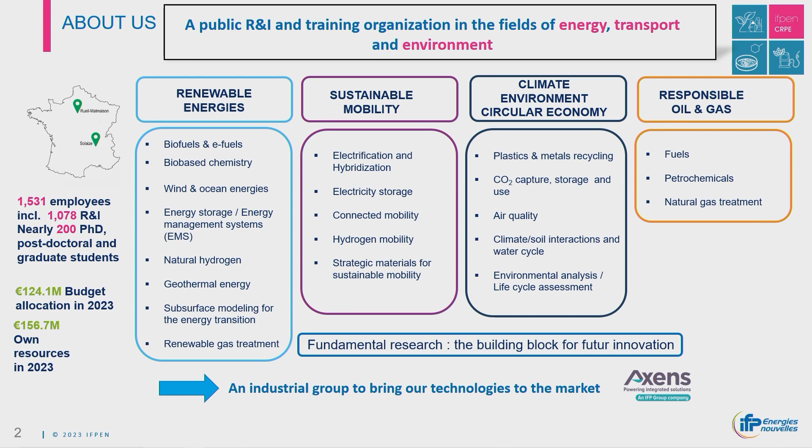We are still keeping an activity in our traditional field of oil and gas, where we are leaders, with our partner Axens selling the innovations of IFPEN and bringing our technology to the market. We have two sites in France, more than 1,500 employees, most of them research scientists with PhD students. Fundamental research is the backbone of our innovation and supports everything I will present.

Coming to low carbon fuels, we believe they are part of the solution to the problem of climate change, especially for transport sectors that are difficult to decarbonize, such as aviation or marine fuel. We have this mandate under RED for 5.5% of final energy in transport, so it's tomorrow, and we have to provide efficient solutions to reach these targets.

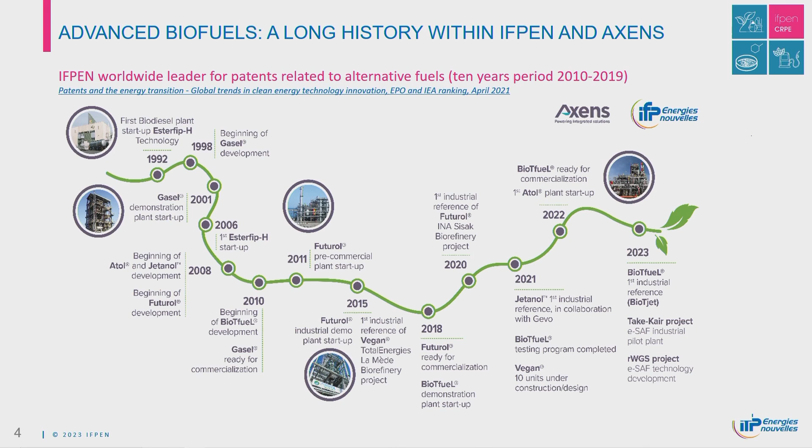We have a long history with Axens developing this innovation, starting in the 90s with first generation biofuels based on the Esterfip-H technology, esterification of vegetable oils. In the same years we started development of Gasel, our proprietary Fischer-Tropsch technology. At the end of the first decade of the century, we started two major projects, Futurol and BioTFuel, which are the two core technologies for production of ATJ and Fischer-Tropsch biofuels. These two major demonstration projects ended in 2018 and 2022, and we are now in the process of first industrial demonstration and commercialization of these technologies.

So we have four pathways to produce SAF. The most mature is HVO, hydrotreatment of vegetable oils, mainly a two-step process, which is at high TRL. We already have almost 13 references of plants producing SAF or under construction.

Then we have two main pathways for second generation SAF production: BTL or e-BTL, with addition of renewable hydrogen, based on a gasification step and the Fischer-Tropsch reaction. And, based on Futurol, the ethanol-to-jet production pathway: production of ethanol, then dehydration and oligomerization. That's called Jetanol, and we have a first reference in the US in collaboration with Gevo.

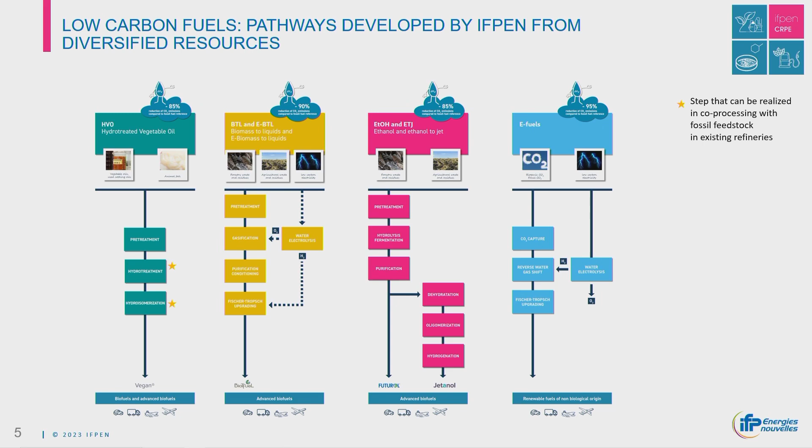And for e-fuel, we are entering this competition as well. We have here three flagship projects, competing in a landscape where many projects are announced across Europe. The problem is that no one has yet reached final investment decision, and we are working very hard with our partners to reach a final investment decision by the end of this year or next year, especially for the BioTJet project or the Nacre project in the south of France.

We are also part of the Take Kair project, which, not far from here, is planning to produce 50,000 tons per year of e-fuels based on CO2, CO2 waste from cement production.

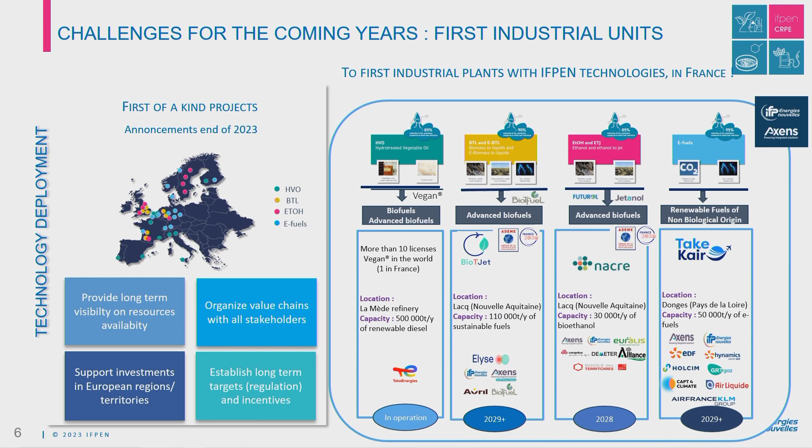What are our challenges ahead of us in the coming years? First and foremost, we have to reach final investment decisions, and for that we need to reduce costs. Reducing costs means developing more efficient processes and catalysts, with disruptive pathways. It also means diversifying resources.

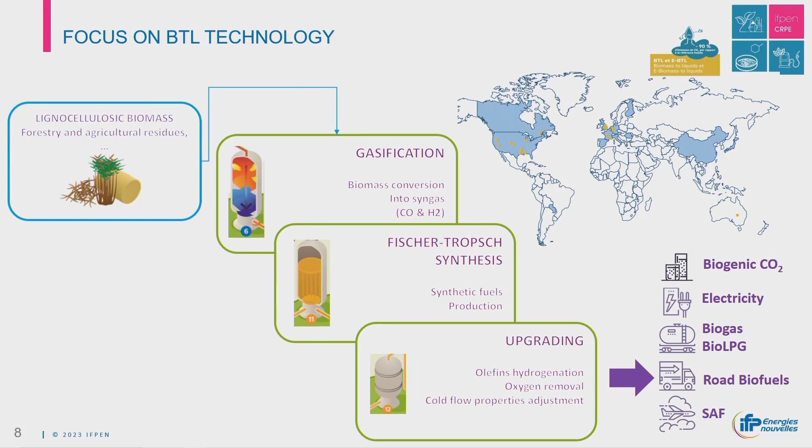The strength of this process is that it is based on our knowledge with Axens on the Fischer-Tropsch synthesis. This is a proven technology, special technology developed at IFPEN on cold flow models, and demonstration units which have been operated in collaboration with Eni in the year 2000, producing 20 barrels per day, 25,000 hours of production. So fully demonstrating our slurry bubble FT technology.

And then we have the upgrading units with well-known, well-optimized IFPEN and Axens processes with catalysts for all these reactions. So we are able to achieve production of diesel and kerosene under specification in different modes. Maxi diesel, of course, is not our subject, but we turn to Maxi Kero. Now we guarantee 70%, and in the very close future, we hope to be able to provide 80%.

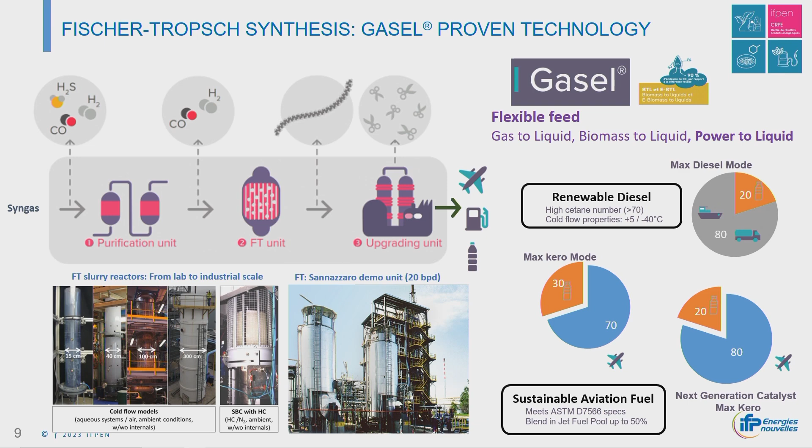When we talk about e-fuel, we have to keep in mind the objective to reduce by 65 or 70% the CO2 index. This target is quite well achieved with the BioTfueL technology. You see that we get a 90% saving, the remaining emission coming mostly from the biomass supply. So that can still be optimized by local sourcing, utilization of more waste, and so forth.

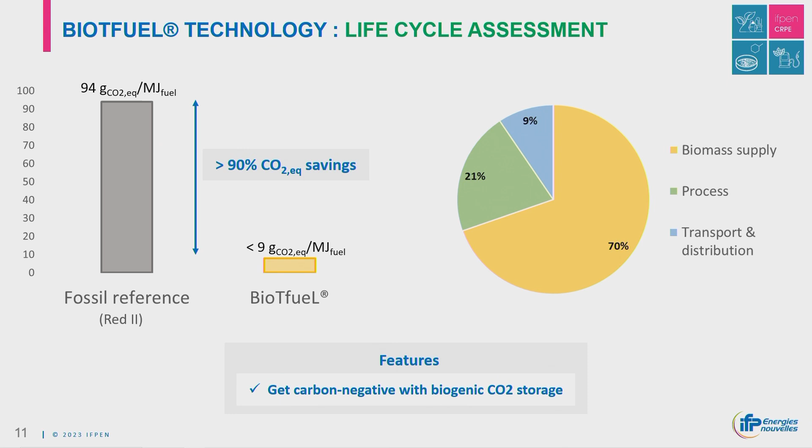So in terms of feedstock, we have a diversity of feedstock which can be applied to the gasification, thanks to the pre-treatment, which has been demonstrated. The purpose of a pre-treatment is to get a torrefied biomass, which can be easily ground and processed through the gasifier, and concentrated in energy also.

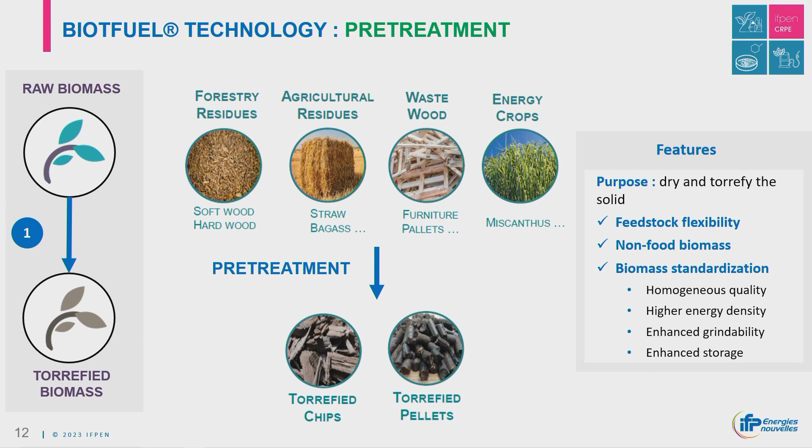So the gasification technology is provided by our partner, Uhde, ThyssenKrupp. It's entrained flow gasification, having the main advantage to be under pressure for the downstream units, operating with pure oxygen, and producing saturated syngas for the downstream reaction.

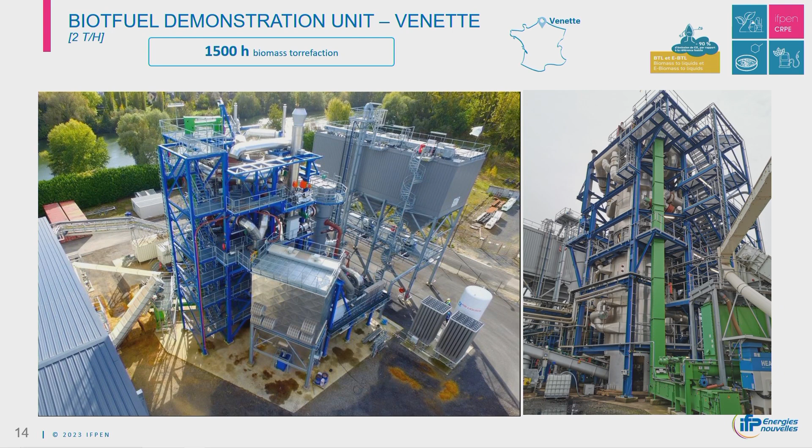Here to give you a view of what we achieved through the BioTfueL project. We managed to build and operate two major demonstration units in the north of France. One near Compiègne, which operated continuously for 1,500 hours, producing 2 tons per hour of torrefied biomass. And also demonstration plants in Dunkirk, where we processed the biomass which was torrefied, and also other biomasses. And then you have grinding units and gasification units and processing of the syngas, just feeding an FT pilot plant here.

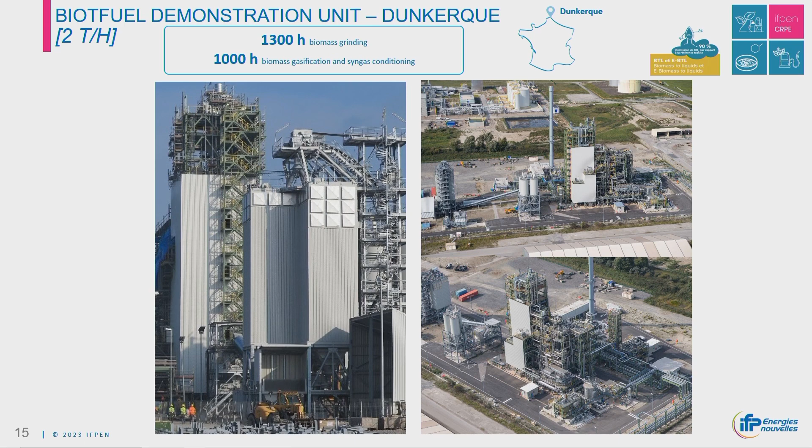We can increase the yield of production, and we can double the SAF production just by, I would say just, but it's quite costly, but it's economically interesting because you are doubling the production of SAF by injection of hydrogen to get the good ratio for the FT production. So you avoid water-gas shift reaction and CO2 production.

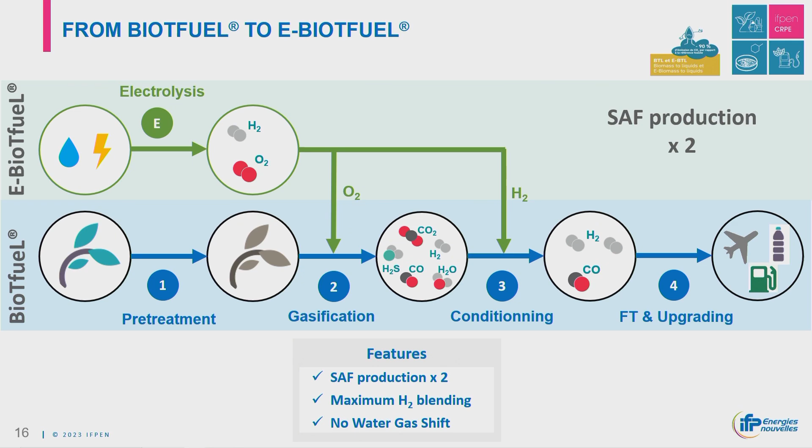Here some figures of our flagship BioTJet project. It is a project which started with Elyse Energy supporting the project and as the leader on the project, which aims to produce 75,000 tons per year of e-biokerosene in the south of France, representing 15% of demand at the time when it's supposed to start. Of course, we have to get through the final investment decision, and we have reached some milestones with a public consultation, which was not an easy task, but which helps to improve also the project, the feeding plan, which is very important to have some diversified feed supply.

And it's also very important and supported by the local people, because it is an opportunity to be sovereign in terms of SAF production in France and to create jobs in this area.

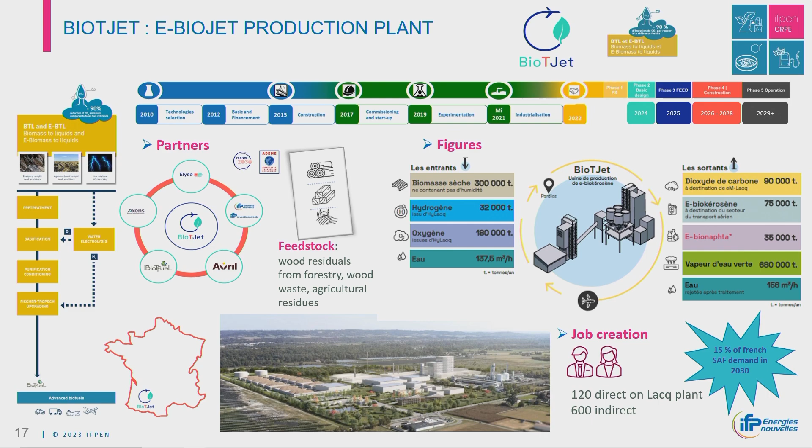I will conclude to say that we are not alone. IFPEN is active in a network with a lot of public players, public authorities, and also industrial partners to succeed in these challenges. So we really think that SAF is an opportunity for France, and we work to meet these challenges. We have the opportunity to talk about that in this debate. Thank you.

Thank you, Julien, for the presentation. In the audience, do you have some questions about the technologies developed by IFPEN? Yeah, maybe I have one question about the production costs of the different technologies that you have presented. Are they in the same range, or are they different?

I think it's not working, this one. So. Yes.

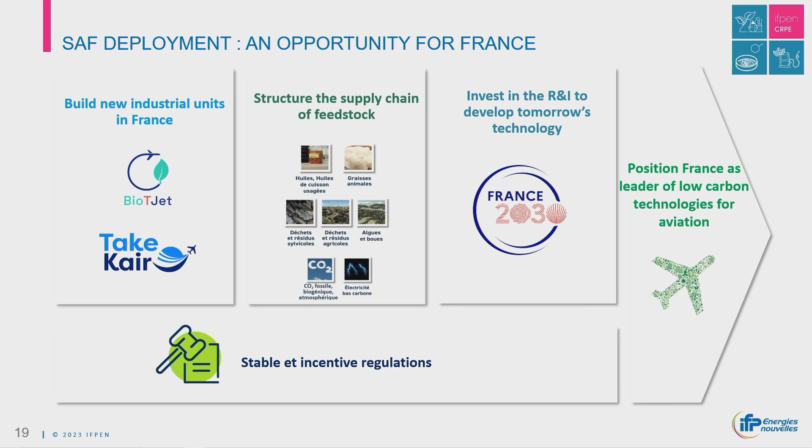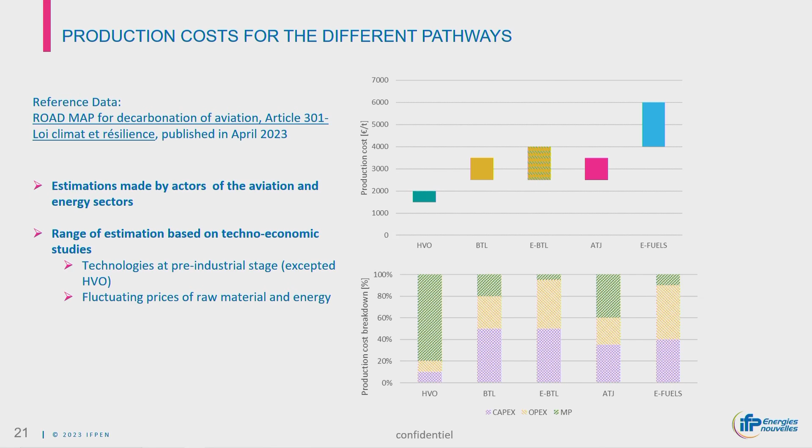Thank you very much, Julien. Now we pass to our second presentation that will be presented by Frank Lightart, the Vice President of SFW. He will explain to us what is SFW. So he leads the circular carbon business, and he has a mechanical engineering background with 25 years of experience, and actually he's focusing his expertise on the gasification and combustion of biomass waste, along with a deep understanding of carbon capture technologies. So, Frank, the floor is yours.

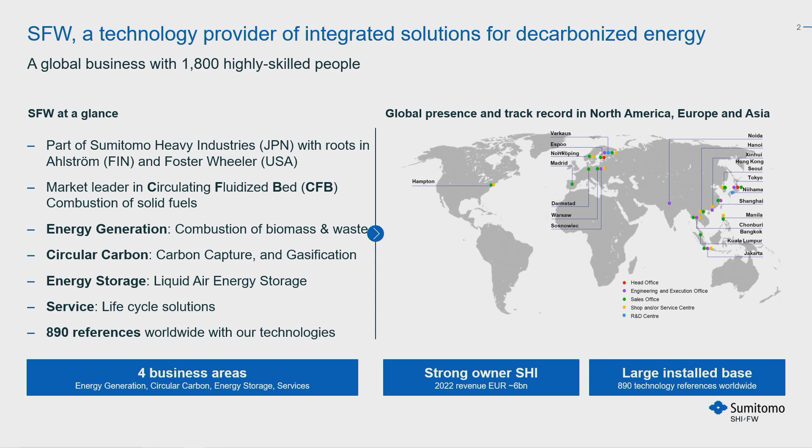Energy storage, there we focus on large scale, long duration energy storage with a technology called liquid air energy storage that we license from Highview Power, our partner. And all of that is supported by a service business with presence in Asia, Europe, and North America. And altogether with our technologies, we have about 900 references today globally. So this is how we like to present our portfolio of solutions in this sustainable fuel ecosystem. So how our solutions bridge the gaps in this value chain from, on the left, the non-recyclable biomass or waste streams and renewable electricity, to the right, the liquid drop-in fuels. I will not go through this all in detail now, there's no time for that. I will just focus on the gasification part.

So we are a supplier of complete gasification islands, including the gasifier and the syngas cleaning. So unfortunately, I don't have a pointer here. It doesn't work on these screens, I guess. But you can see the non-recyclable biomass waste on the left. That is fed into our so-called oxy-steam fluidized bed gasifier, turning that into a syngas composed of carbon monoxide and hydrogen, which is then cleaned and can be fed directly into the synthesis to produce these sustainable fuels, or it can be first mixed with green hydrogen from electrolysis. And then comes the synergy with electrolysis, like EBTL was mentioned already in the previous discussion. So the oxygen byproduct from the electrolysis can be fed into our oxy-steam gasifier, reducing the power consumption of the gasification island.

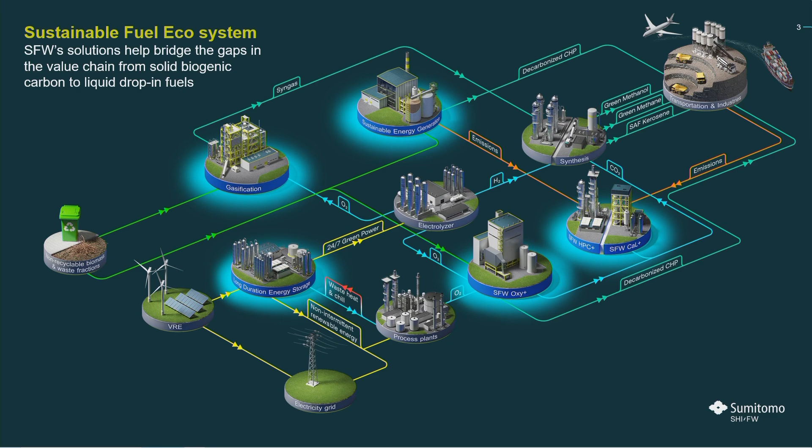Not to go very much in detail on the technology, but just to show what our value proposition is based on. So at the core of our gasification island, we have this low-pressure oxy-steam circulating fluidized bed gasifier that you can see here. So we feed the solid biomass or waste into the CFB gasifier, into a bed of limestone and sand, which is then fluidized by a mixture of oxygen and steam.

And then very simply, the oxygen burns part of the fuel or part of the feedstock to generate the heat that is required to drive the gasification reactions and turn the biomass or the waste into a syngas. And then after the gasifier, you have your hydrogen, you have your CO. Of course, you also still have tars and dust, so there is still a gas cleaning component.

Now, why CFB gasifier? I try to sort of list the main benefits that we see from this technology. First of all, CFB gasifier is very versatile in terms of the bio waste that it can handle. Very limited pretreatment required to feed it into the gasifier. And it can handle a wide range of not only biomass but also waste feedstocks. And then the conditions in the CFB reactor are such that the carbon in your solid waste or biomass is completely converted into the syngas with almost 100% efficiency.

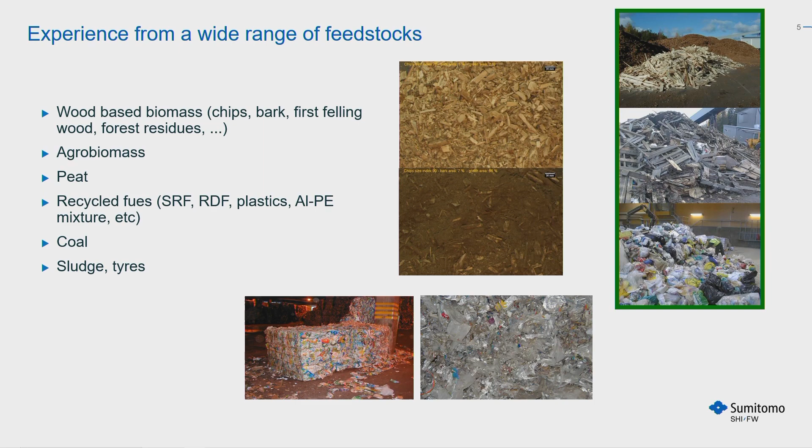So quite a versatile technology, a wide range of feedstocks have been utilized, and altogether we have about 40 years of experience with fluidized bed gasification at SFW. We have delivered 11 gasifiers altogether, some pilot plants, some demonstration plants, and a lot of commercial gasifiers, and close to 1 million operating hours today with our gasifiers on biomass and waste. And you can see we already started in the early 80s providing biomass gasifiers to the pulp and paper industry, mostly for lime kiln applications to replace fossil fuels in lime kilns with fuel gas from biomass.

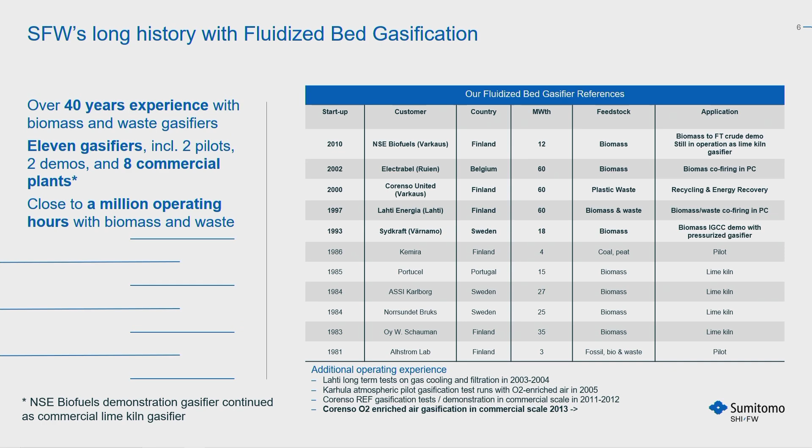I will not go through all of these, obviously, but I just want to highlight one reference, and that is the so-called NSE Biofuels demo plant. That is an industrial demonstration of biomass to liquids using an oxy steam circulating fluidized bed gasifier of SFW, located at the Stora Enso pulp mill in Varkaus in Finland. So NSE Biofuels is a joint venture of Neste, a sustainable fuel producer, and Stora Enso, a sustainable material producer from Finland. And they contracted with us to deliver the gasification island for this plant, including the gasifier and also the syngas cleaning.

And this plant was operated for about 1.5 years in oxy steam gasification mode, accumulating close to 9,000 operating hours with an average reliability of 95%, using the feedstocks that you can see here. So a wide range of these typical woody-based biomass residues from pulp and paper and forestry industries. Yeah, the result was that the technical viability of this technology has been demonstrated now, and it's ready for commercial application. The gasifier is still today in operation as a lime kiln gasifier at the Stora Enso pulp mill, feeding the lime kiln with a fuel gas from biomass gasification, and has accumulated up to today about 100,000 operating hours.

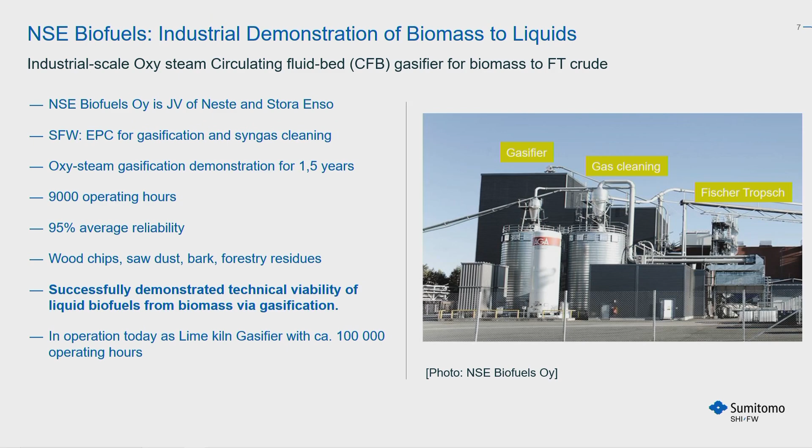So that is a good basis for a commercial plant as the next step. Now, just to give you a flavor of the kind of yields that can be achieved with biomass gasification in combination with methanol or Fischer-Tropsch.

And of course, this is very project specific, and again, this is only to give a flavor of what is possible. Here you have a very simple setup where the required hydrogen to carbon monoxide ratio for the synthesis is achieved by water gas shift. So shifting the CO in the syngas with water gas shift.

And then you can see that 300,000 tons per annum of wet biomass is converted into methanol with about 50% mass efficiency and about 60% energy efficiency. And then for SAF, the numbers are about 20% for mass and about 50% for the energy. Now this can be optimized.

EBTL was already mentioned as a term. So that is what we see very much in the market at the moment. Typically in the forecasts, power to X and gasification are sort of put against each other as competitors, but actually they work together. So we can replace the water gas shift by adding hydrogen from electrolysis to the syngas to significantly boost the yields, or of course significantly lower your biomass consumption for a certain amount of biofuel.

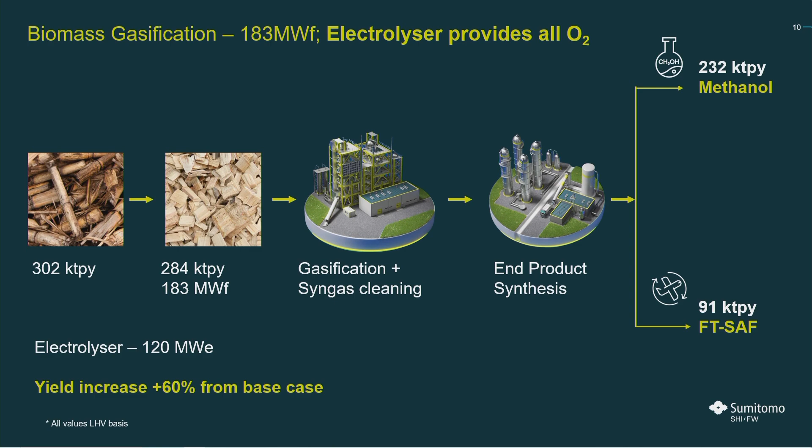So here you can see that with a 40 megawatt electrolyzer added to this setup, you boost the yields by about 30% compared to the previous slide. That you can also further optimize if the electrolyzer is sized to produce all the oxygen that is needed for the oxy-steam gasifier. Then you would need a 120 megawatt electrolyzer in this case, and the yields go up by about 60% compared to the base case that I showed earlier.

Okay, so what are we concretely doing at the moment? It was already mentioned that FIDs are missing at the moment. That is true, but the market is extremely active, both in Europe and in the US and also Australia. And this is a typical project that we are working on together with a customer. In this case, Capwatt, a customer in Portugal, developing a green methanol project, the so-called Mangualde renewable methanol project.

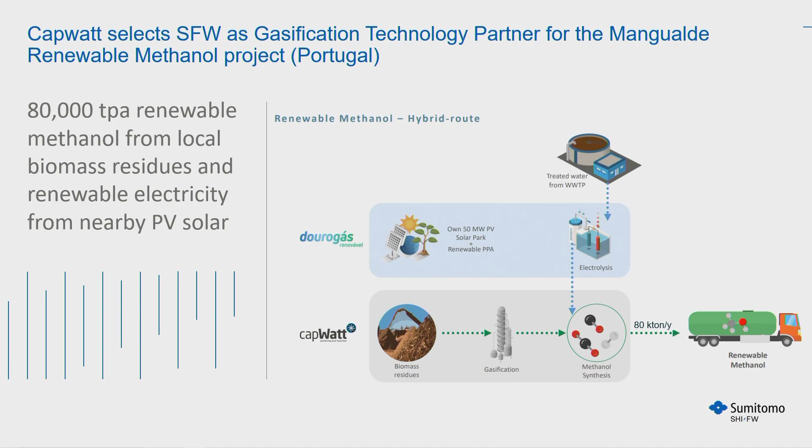And they selected us as the gasification technology partner for this project in Portugal, which when it's in operation will produce 80,000 tons per annum of renewable methanol from locally sourced biomass residues. And again, with this hybrid concept, using also green electricity from a nearby PV solar farm. This is currently in the so-called FEED stage that we are working on at the moment to underpin the FID of the customer later this year, hopefully during autumn.

Another project is in Texas in the US, where we are working with our customer Pathway Energy on their GT project, which is a big project. I mean, the methanol project was relatively small. This is a much bigger project, like SAF projects tend to be. And this is a very interesting project because it combines a lot of elements that you can see here.

It combines bioenergy with carbon capture and storage, so-called BECCS, to produce carbon negative renewable electricity to power the biorefinery, which is a gasification to liquids concept using our gasifier and a Fischer-Tropsch process to produce SAF. And of course, like already mentioned, a carbon capture and storage element to put the CO2 under the ground.

So when this plant is in operation, which of course is still a few years ahead of us, the FID is due sometime later this year, it will produce carbon negative SAF of about 2,400 barrels per day with a carbon intensity score of minus 300 grams of CO2 per megajoule.

Now we are not only selected for the gasification island, but we are also providing the so-called oxy-fuel combustion technology that we have developed at SFW for the BECCS plant. So that is a technology that uses a mixture of oxygen and carbon dioxide for combusting the biomass and thereby producing a flue gas that is 90% CO2, which then needs to be dried, of course, purified, and then can be compressed for storage.

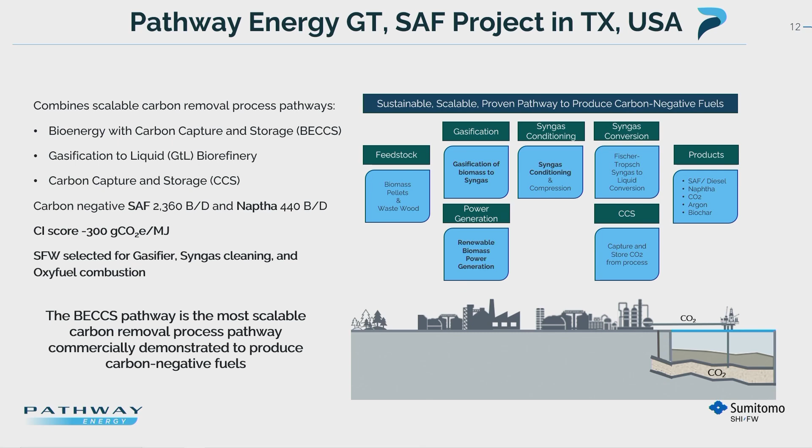Then a little bit at the end, this is the last slide, just to show what kind of scope we provide as SFW.

So this is the same scope for both the Capot project and the Pathway project. So we are very versatile. We can help support methanol projects, SAF projects, green renewable natural gas projects with this kind of scope.

So again, I don't have a pointer here, but maybe you recognize at the core the CFB gasifier, turning the biomass into a raw syngas, which is then cooled in the raw syngas cooler, going to a filter to take out the dust, take out the corrosive components, after which it goes to a reformer, which then cracks the tars that are still in your syngas into smaller molecules, into carbon monoxide and hydrogen,

after which you have a dust-free, tar-free, corrosive component-free syngas, which is then further cooled and going to the final cleaning step, which is a conventional scrubber to take out the ammonia, sulfur, and chloride compounds. And then you're ready to put it into your syngas compressor to lift up the pressure to the level that you need for the synthesis.

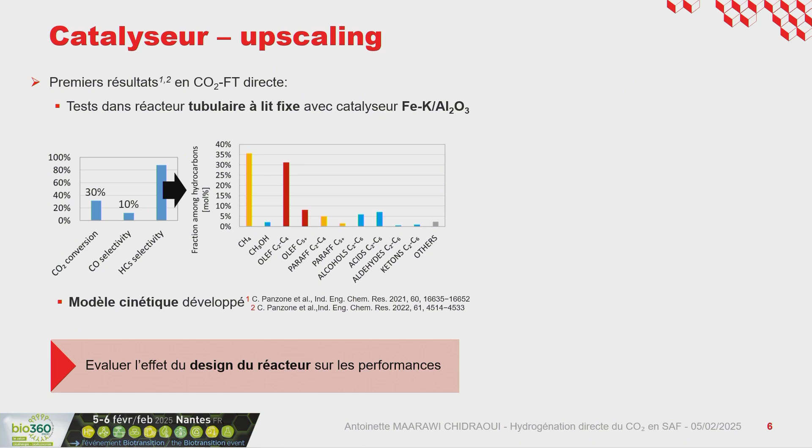Donc ce que j'ai fait, c'était dans le but d'évaluer l'effet du design du réacteur sur les performances de cette réaction. En prenant comme point de départ le catalyseur qu'on connaît, on le synthétise à une échelle plus grande par un industriel. Donc on a un catalyseur upscalé qu'on teste dans le même réacteur. On trouve des résultats différents de ce qui était obtenu, avec des conversions supérieures à 30%.

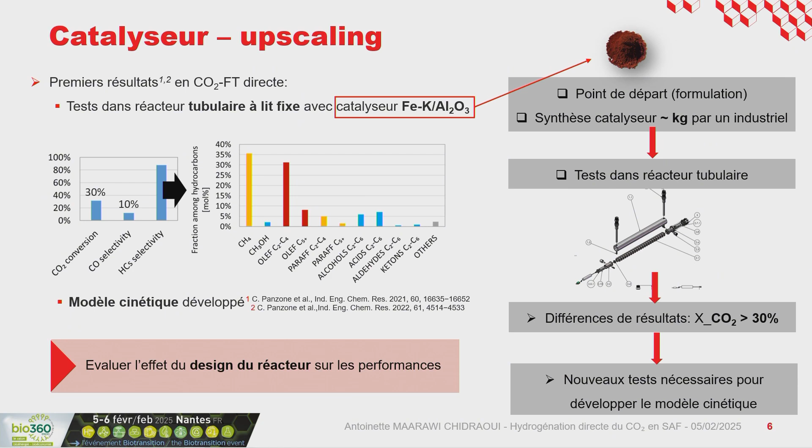Donc ces différences de résultats nous poussent à faire de nouveaux tests avec ce catalyseur upscalé pour développer un modèle cinétique spécifique pour ce catalyseur. Pour ce faire, j'ai varié différents paramètres de la réaction pour voir l'effet.

Donc la température entre 250 et 310 degrés, la pression totale jusqu'à 20 bars, et le ratio hydrogène-CO2 à l'entrée du réacteur entre 3 et 12, et puis le temps de contact, le tau modifié, qui est la masse du catalyseur par rapport au débit des gaz entrants, pour voir l'effet sur la réaction.

À l'issue de chaque test, il faut analyser les produits. On analyse la phase gaz, la phase organique et la phase aqueuse pour identifier et quantifier les produits obtenus.

Donc parmi ces différents paramètres, je n'ai pas le temps de vous détailler tous les effets, mais je vais parler de deux effets. Donc l'effet du temps de contact d'abord.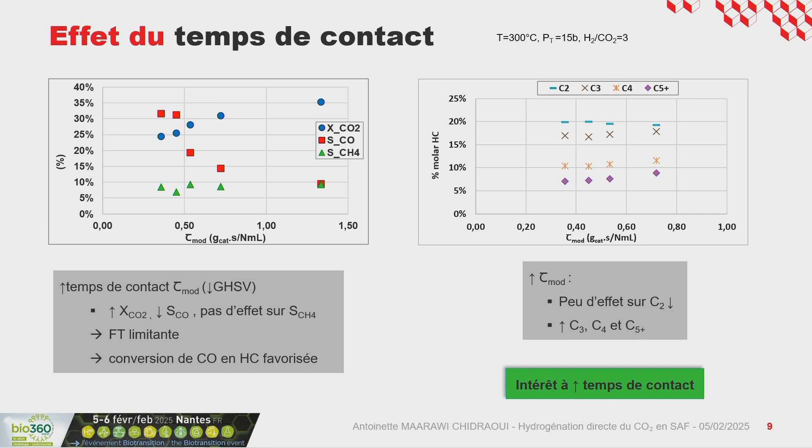Donc on voit une influence sur la sélectivité vers les C5+, par exemple, en particulier, là on s'intéresse au C5+. On voit que ça augmente avec l'augmentation du temps de contact. Donc on a intérêt à augmenter le temps de contact si on veut augmenter la sélectivité vers les C5+.

Après, concernant la température, en augmentant la température, on augmente la conversion, en diminuant aussi la sélectivité en CO, mais on produit un peu plus de CH4. Et du coup, la température a un effet sur les deux étapes de réaction, mais ça active davantage la Fischer-Tropsch, puisqu'on diminue la sélectivité en CO.

Concernant les produits, on voit quand même une augmentation des C5+ avec la température. Donc on a aussi intérêt à augmenter la température, mais à ne pas trop l'augmenter non plus, pour ne pas désactiver le catalyseur.

Donc, d'après ces deux résultats, on pourrait dire que pour augmenter le temps de contact, qu'est-ce qu'on peut faire? On peut diminuer le débit à l'entrée du réacteur, mais on diminue la productivité. On pourra aussi augmenter la quantité du catalyseur qu'on utilise dans le réacteur.

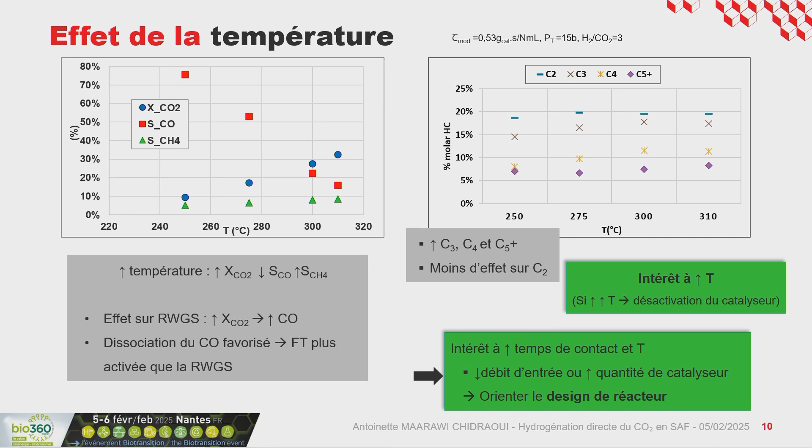C'est faisable avec ce catalyseur qui est peu coûteux, mais il faut faire attention. Si on augmente l'épaisseur du lit catalytique, il faut faire attention à la contrainte thermique pour ne pas avoir de points chauds.

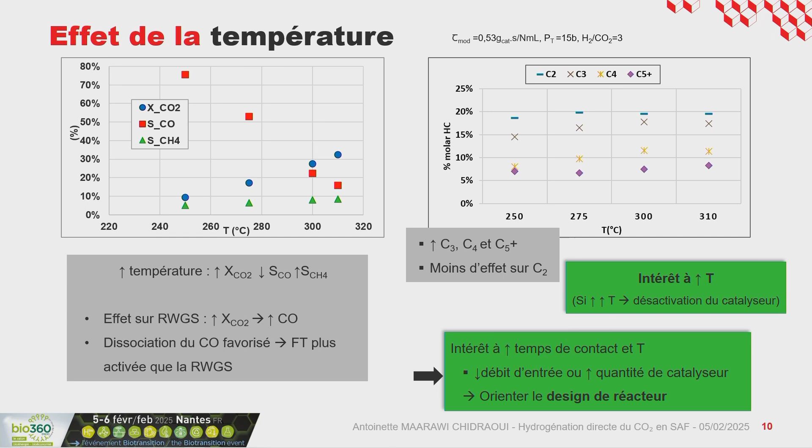Donc tout cela nous permet d'orienter le design du réacteur et penser à un réacteur qui nous permet de bien gérer la température, mais aussi, pourquoi pas, avoir un réacteur qui nous permet de prolonger le temps de contact et du coup le trajet du gaz dans le lit catalytique.

Donc je passe par la suite à un paramètre qui est important, c'est l'alpha. C'est la probabilité de croissance de la chaîne de l'hydrocarbure formée. Donc plus l'alpha est élevé, plus on produit des chaînes longues. Ce alpha peut être obtenu à partir de zi, qui est la fraction molaire de chaque produit formé.

Donc si on revient à la littérature pour voir les procédés Fischer-Tropsch à partir du CO, pour des catalyseurs à base de fer, dans la gamme de température qu'on étudie, en bleu, les valeurs de alpha sont entre 0,7 et 0,8.

Si on regarde ce qu'on a obtenu dans la partie expérimentale, on a des alphas qui sont entre 0,7 et 0,73. Donc là, les alphas obtenus pour la réaction Fischer-Tropsch modifiée à partir du CO2 sont dans la gamme des alphas obtenus à partir des procédés Fischer-Tropsch du CO.

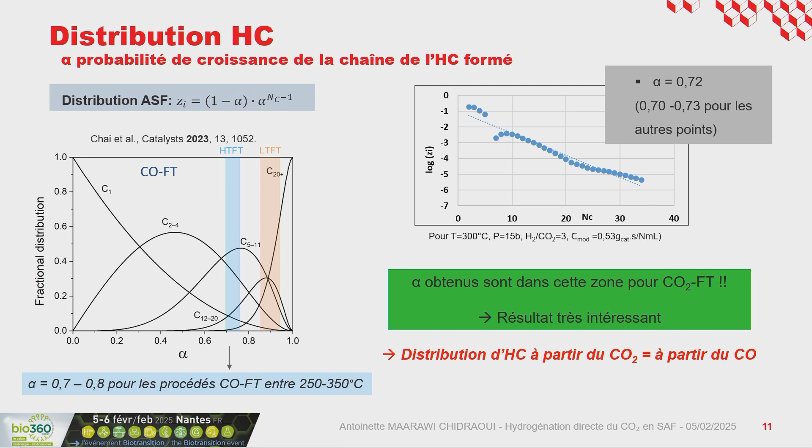Donc ça, c'est vraiment un résultat très intéressant qui nous dit qu'on réussit à produire à partir du CO2 ce qu'on produit à partir du CO.

Donc, par la suite, avec toutes ces données, on a pu développer un modèle cinétique pour ce catalyseur upscalé, et on l'a intégré dans un modèle de réacteur tubulaire, un modèle 2D.

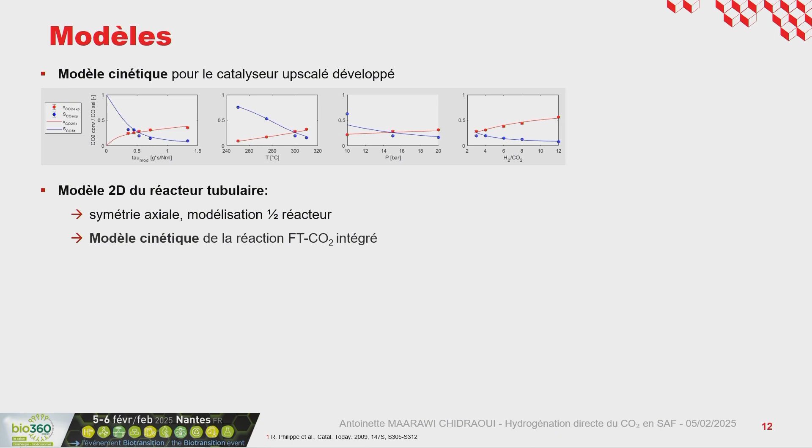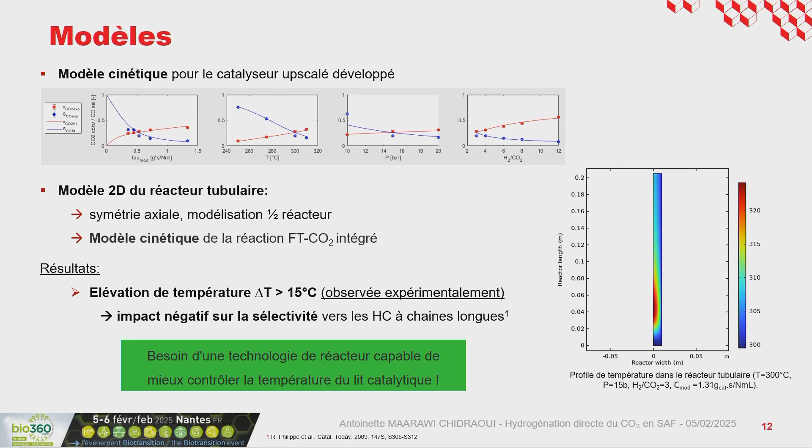On a fait des simulations et on remarque que dans certains cas, il y a une élévation de température qui peut dépasser les 15 degrés, ce qui est aussi observé expérimentalement, mais cela affecte négativement la sélectivité vers les hydrocarbures à chaîne longue. Du coup, on est sûr qu'on a besoin d'une technologie capable de mieux gérer la température du lit catalytique.

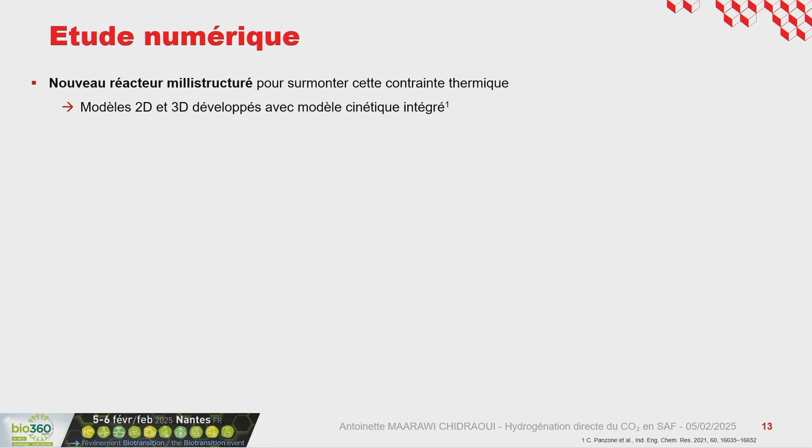Cela nous a poussé à penser à un nouveau réacteur millistructuré qu'on a modélisé pour surmonter cette contrainte thermique. On a développé des modèles 2D puis 3D avec le modèle cinétique intégré. Et là, on a obtenu, au lieu de 15 degrés, moins de 1 degré C d'élévation de température dans le lit catalytique.

Tout en conservant les performances en conversion et en sélectivité, donc ça c'était un résultat intéressant qui nous a poussé encore à optimiser le design de ce réacteur. Et là, on trouve un delta T de 3 degrés C qui reste toujours acceptable en ce qui concerne l'effet sur la sélectivité des produits, mais on a obtenu aussi des performances maintenues, et on a doublé la productivité. Donc là, à nouveau, on voit que ce nouveau réacteur est prometteur et mérite d'être encore optimisé avant d'utiliser ce réacteur pour cette réaction de Fischer-Tropsch directe à partir du CO2.

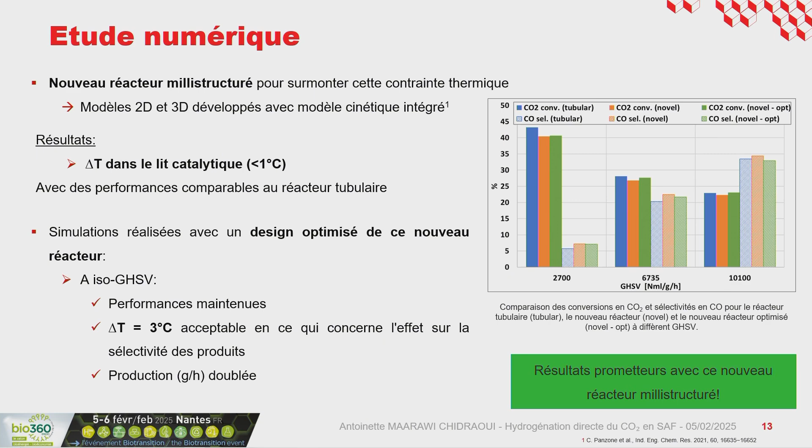Je passe aux conclusions. Pour la partie expérimentale, un catalyseur upscalé a été testé et les effets de différents paramètres ont été étudiés sur les performances de la réaction, pour mieux comprendre et orienter le design du réacteur. Après, un résultat intéressant, c'était les valeurs de alpha obtenues qui étaient dans la gamme des alpha obtenus pour des procédés Fischer-Tropsch traditionnels.

Un modèle cinétique est développé et intégré dans la partie numérique. Donc là, on voit les allers-retours entre la partie expérimentale et la partie numérique. On a un modèle avec des résultats prometteurs pour un nouveau réacteur structuré, mais ça nécessite encore des validations expérimentales.

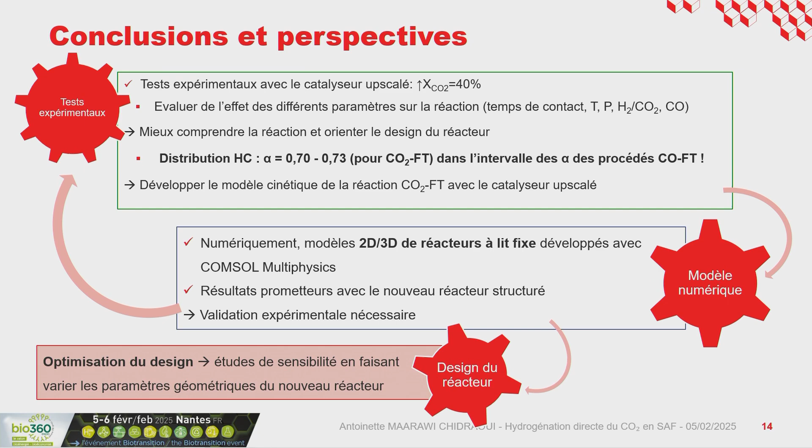Tout cela nous mène à faire aussi des études de sensibilité dans le modèle numérique pour varier les paramètres géométriques de ce réacteur, de ce design, pour optimiser le design de réacteur et aller à une proposition de technologie plus adaptée à cette réaction d'hydrogénation directe du CO2.

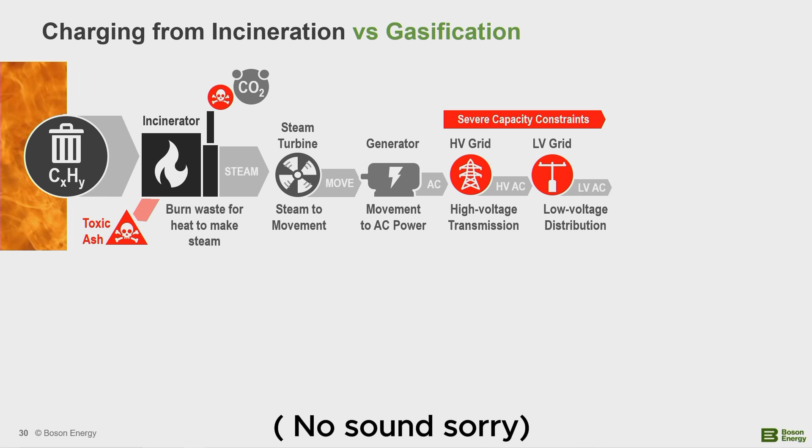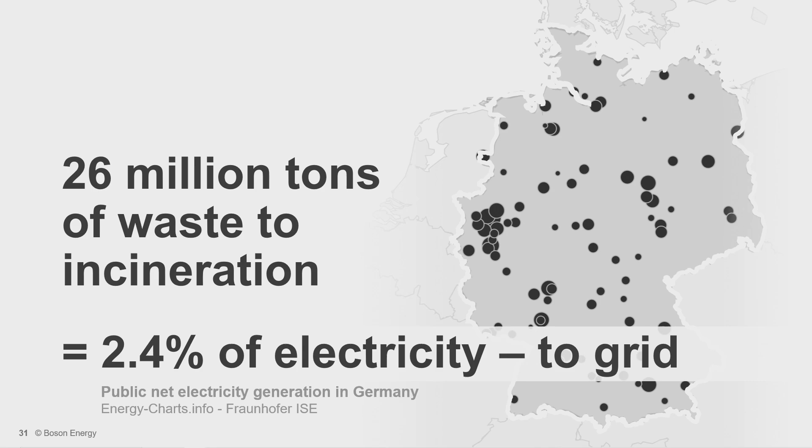Capacity constraints in the grids today, so this isn't really working. And if we look at Germany, running that process on 26 million tons of waste produces how much electricity for the German energy system? 2.4%. So almost nothing. And that's why incineration is the fax machine of waste management. I don't have a fax on my desk, I don't know about you.

If we go back to the chemistry then, we crack instead the hydrocarbons into hydrogen and CO2, which is captured. We have zero ash. Instead, we have a slag material that can be used as a construction material. But there's no hydrogen economy. So what do we do with this hydrogen?

One thing we need to do is we need to go into sector coupling. We need to change the way we think about energy. We need to use the resources that we have in new and innovative ways. Another example of sector coupling is two actors buying a football team to start a TV series.

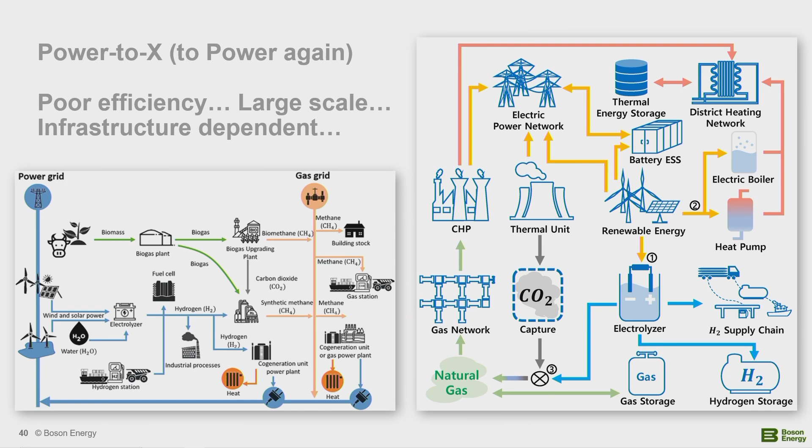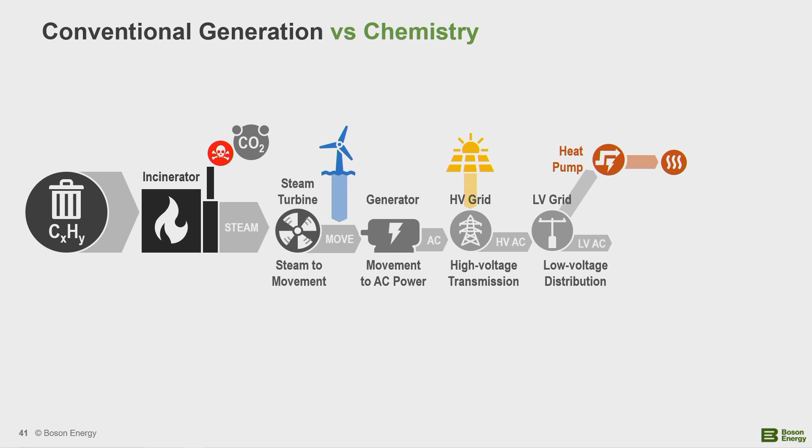If we go back to energy, you've all seen these charts all over the place. The only problem is that the efficiency is very poor. It's often large scale and it's infrastructure dependent. If we go back to the incineration systems, yes, you can add some wind, you can add large scale solar. The only sector coupling going on is power to heat pumps, still coming from the grid. And then you have the SAF, the e-chemicals, which you can do from power, but you need to find the CO2 somewhere, and that's often a challenge.

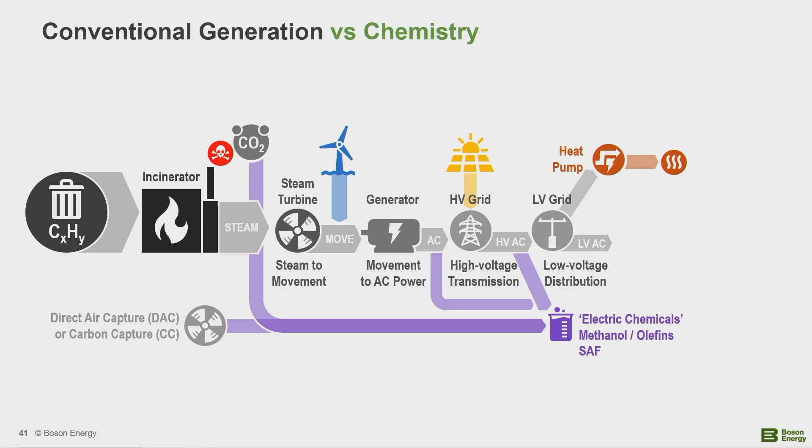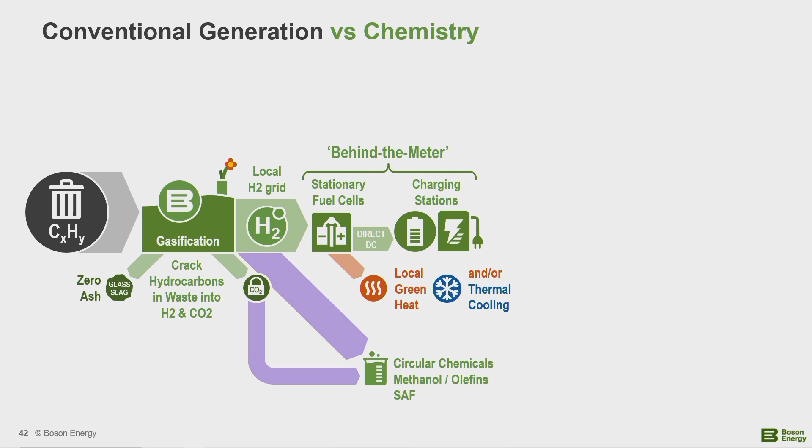If we go back to the chemistry and the gasification, we can deliver speed charging, I'll talk about that tomorrow. We have local green heat and thermal cooling as a byproduct. For the circular chemicals, the SAF, we can take the hydrogen straight from the process, and we have our own CO2 captured that we can use in the process.

And the result of that, yes, the production cost is fairly high, but now comes the interesting part. We have byproduct revenues. We charge a gate fee for our fuel, that we receive for taking care of it.

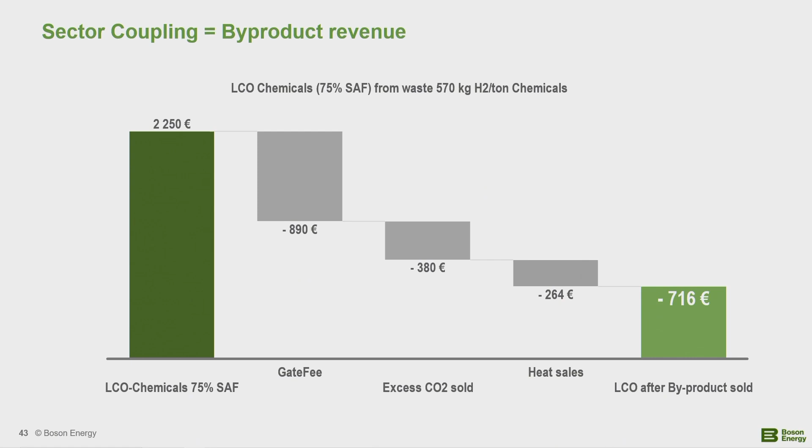We can sell the excess CO2 as a replacement of fossil CO2 in industrial processes. We can sell the heat if we pick our sites well. And as a result, we end up with a production cost that is very close to the fossil. And depending on the various processes that we use, it is conceivable to get that even further down to below the fossil price. And keep in mind here, I have not included various types of carbon benefits in this here. So that comes on top.

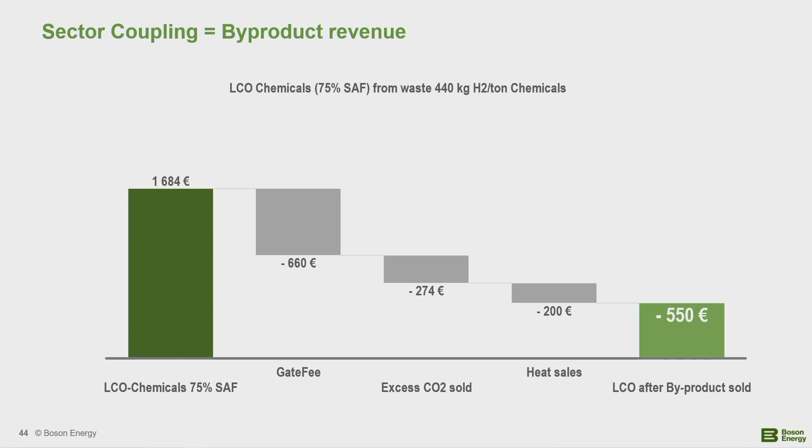Just to illustrate the sector coupling here, if I have 1 megawatt hour of power, I can produce 17 kilos of hydrogen. I have a ton of waste, run it through an incinerator and electrolysis, I get 10 kilos, adding up to 27. On our side, we use gasification. If I self-power and use some of the hydrogen for parasitic power in the system, I get 50 to 60 kilos of hydrogen.

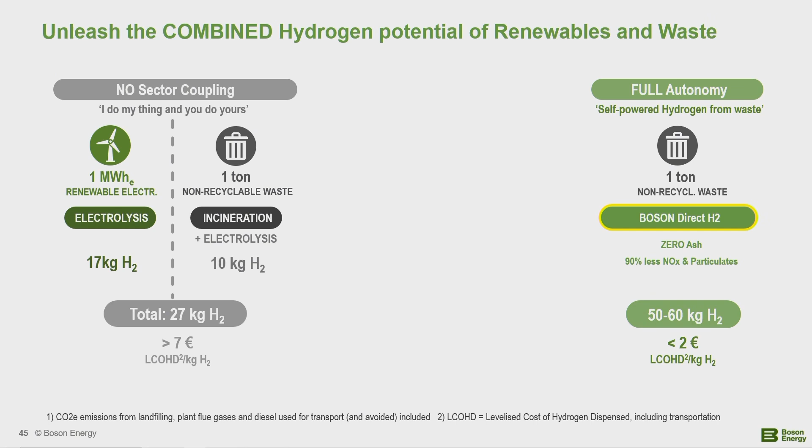Now, if I instead use that megawatt hour of power for my parasitic load, I get a full 100 kilos of hydrogen out. So the interesting thing here is that using that megawatt hour of power in our process gives you 50 kilos of hydrogen compared to only 17 if you run it through electrolysis. That is the nature of sector coupling.

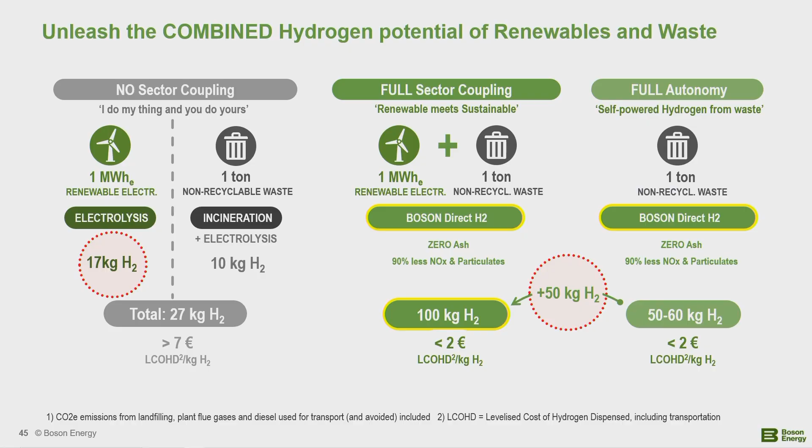Okay, so how did we bring this from science to technology? Gasification of waste is difficult, but it can be done if there is a deep understanding of waste, of high temperature chemistry and energy systems. We have developed a technology that has a high tolerance for waste quality variations. It's simple, gravity-driven, no moving parts. It's a slow process that allows chemistry to do its thing. We're not rushing chemistry. We have a high energy conversion rate, carbon capture, and as I said, no residues.

We've developed this technology from lab scale up to industrial size. We're now taking the technologies that we're developing up to TRL9. We're going to commercial size, which is 2 tons per hour per reactor. Every system has 2 reactors running and 1 on standby.

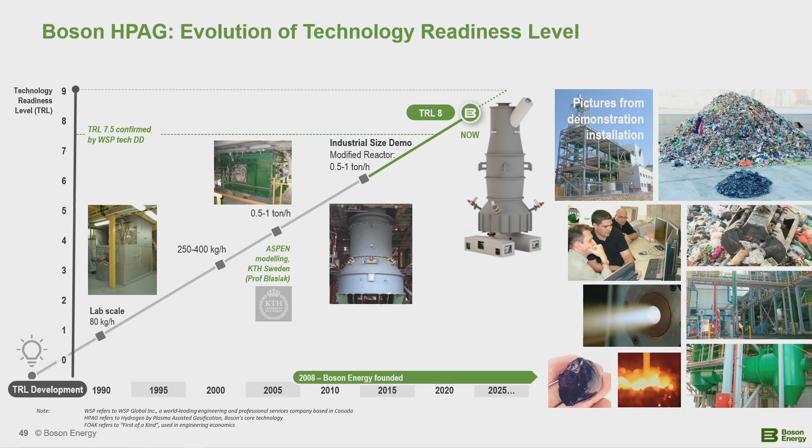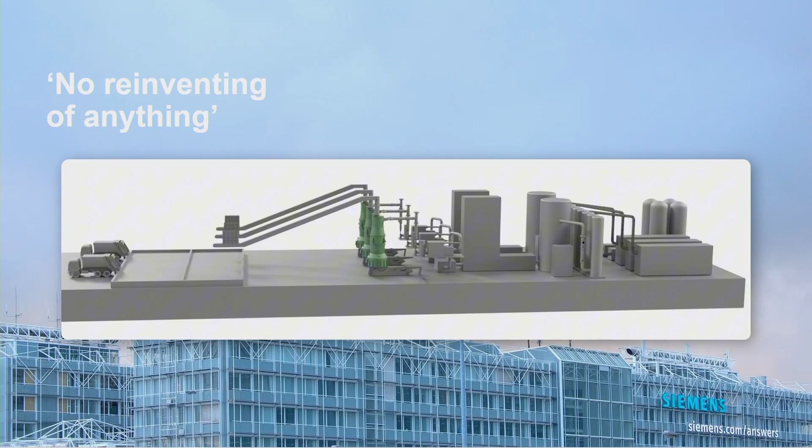How do we do this? We leverage partnerships to get the complete system done. Our principle is to not reinvent anything. So we focus on the reactor system, getting that running to produce syngas. All the upstream systems are commercially available technologies that we bring in from partners. All the downstream systems are commercially available technologies, not all the SAF technologies yet, but it's coming there. These are also delivered by global technology partners, and that gives us unlimited capacity to scale from day one.

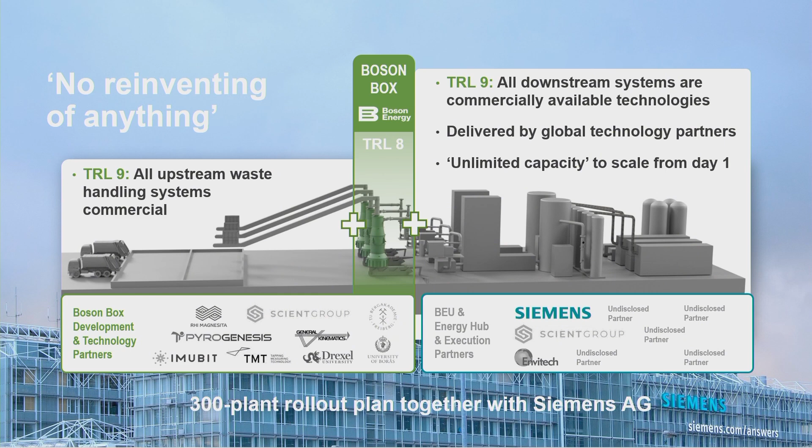We have a 300 plant rollout plan together with Siemens. Not all of those will be SAF. There will be charging as well and other solutions. And that's how we roll. We're developing a number of projects, some of them green chemicals, SAF, some of them charging, and that's what we're doing. Thank you.

Okay. Thank you for your presentation, Heike. Any questions in the audience about this new technology?

Maybe I have a question about the carbon footprint. Since you are dealing with wastes, we see in the waste there is a good part that is fossil-based, like plastics, tires, textile. So how are they accounted for, and how can we judge from the mix at the inlet that we are respecting the sustainability criteria for the fuels? Yeah, exactly. So we're dealing with waste, not biomass. So as you say, part of it is fossil. It's typically around 50%. So all of it will be captured.